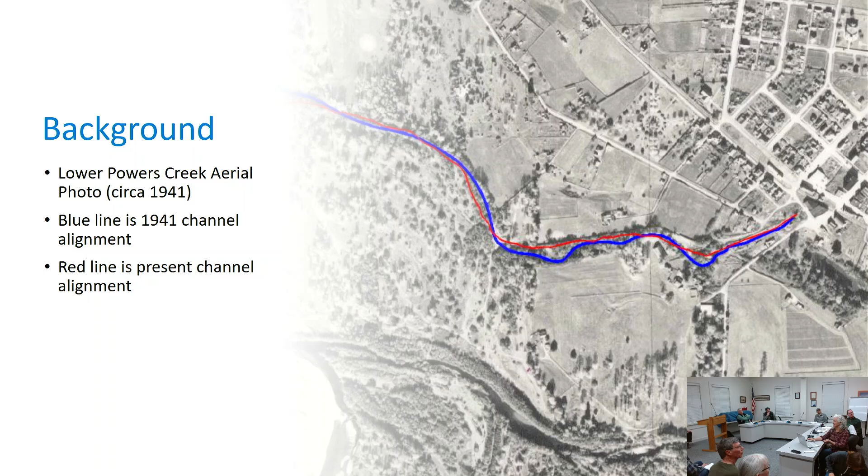In the nice flat loamy soils of the river, and by doing that we encroach upon the creek, and then the creek has to be channelized to be able to accommodate people living there. Here's a picture from April 9th, 1941, shot by Schuster. You can see Applewood Lane, which goes down to

Huh? Sometimes they don't put the screens. Oh, okay. Applewood didn't exist. Okay. Applewood didn't get until. Well, then there was a lane that was not Applewood Lane, which is approximately where it is now. Okay, thank you.

Which has been developed since then, but you guys are aware of the location. To just kind of orient yourselves, here's Hatchery Road. You can see that the creek was coming down underneath the building, and through here, there was a much wider floodplain. It wasn't as developed right at that culvert where it's coming out. Came into riparian forest, and this is where it was channelized. You can see that the forest was still intact.

That's approximately where it was historically, but this is where it was channelized for where the future log pond can be seen. Oh, in front of their house. Yeah, in front of their house. So the channel was brought downstream on the Mad River. Historically, it came across the floodplain this way. It was filled. The log pond, this whole landing was created for timber operations, and they developed a log pond right here.

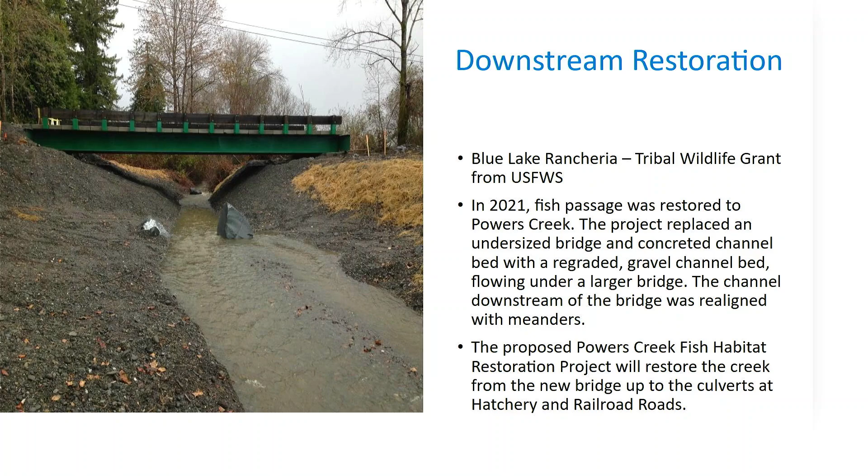So the proposed fish habitat restoration project that we're working on will restore the creek from the new bridge up to the culverts at Hatchery and Railroad roads. That's fun to say. So here's another view looking downstream right after the project was completed. So our project goals and objectives that Dave went through, this is kind of another way to say it, is that we're here to restore salmonid and riparian habitats in Lower Powers Creek and increase the abundance of coho salmon and steelhead populations in the Mad River. In addition, this project will improve flow conveyance and geomorphic function.

Some of the objectives that we have is to improve channel morphology, create and enhance fisheries habitat, and establish a multi-story native species riparian corridor.

Yes, Lynn, can you wait until we're done with the presentation, my section, until we have questions? Sure, absolutely. So what do you need definition for?

Sure. Geomorphology. Geomorphology is a study of the channel shape and how it changes through processes such as a flood, like an every year flood. So you have like a 100-year flood. That's not really going to change the way that the channel is shaped. But you have an every single year flood or every other year flood. And when that channel fills up to the top, we call that bank full.

And that bank full system carries a certain amount of bed load and suspended load, which is the rocks and the sand that are moving through the system. So geomorphology, fluvial geomorphology, fluvial referring to a river, is looking at that process itself and how that system is changing. Geomorphology can be an explanation of a whole landscape. What we're looking at is fluvial geomorphology. Okay? Yeah. Thank you.

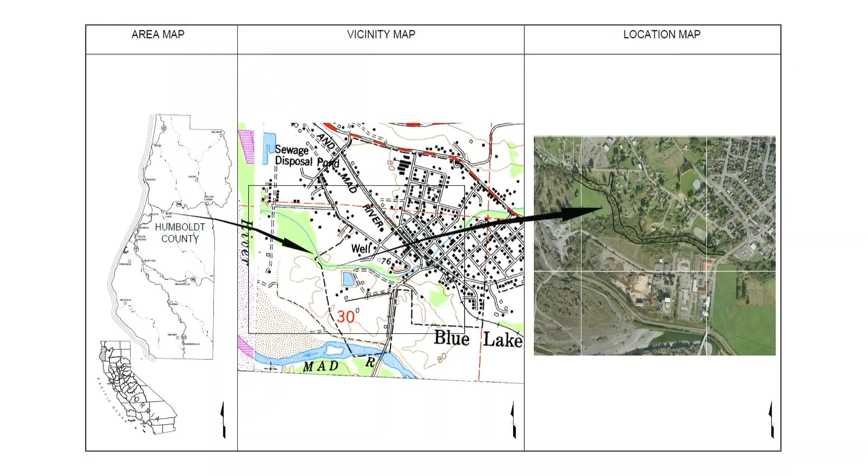So you guys know where you're at. This is your creek. This is Blue Lake. So here's Powers Creek in its existing condition. This was our 30% grading boundary. This is what we started with when we came into the project. We looked at the project and we said, okay, what can we do within this stream corridor? And we kind of drew a line around it, did a grading plan, had 8 to 10 foot inset benches. And we had kind of an idea, a thumbprint on a starting place of how to design this channel.

Come on in if you want. There's still seats up here. Okay.

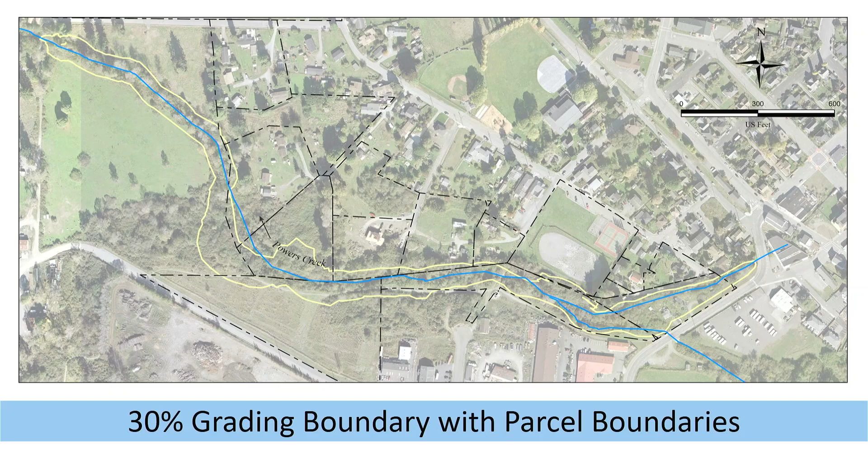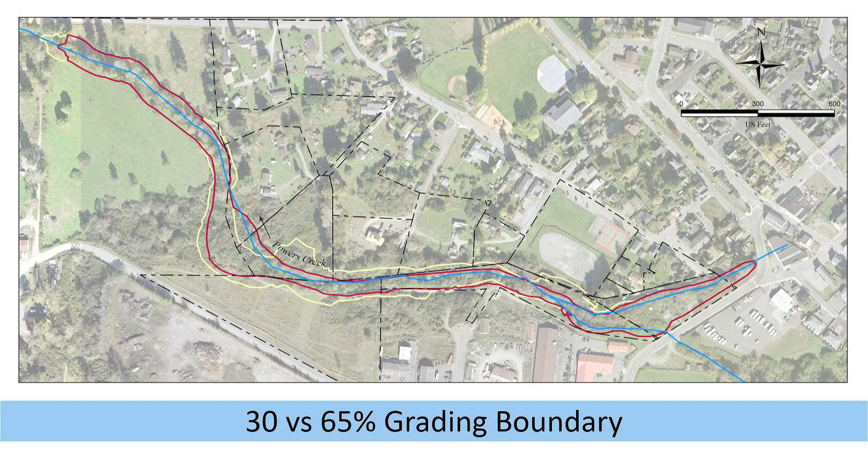Within the 30% design phase, we talked to the adjacent landowners to the creek, and we realized that our project was encroaching in a way that they did not want us to onto their property. So we have adjusted our grading plan for our 65% design, where we have pulled in our project off of areas where we were asked to not cross over into people's property. And so essentially, these are the big changes that we've done between the 30 and the 65% design.

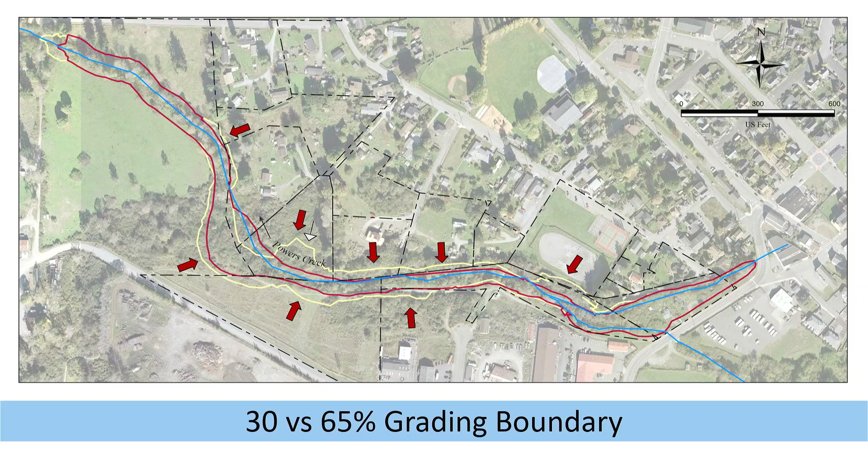So our plan that we had in 30% was a little bit too large, we were thinking big. So now we're trying to kind of scale back, but still have the system work. So this is what we're looking at. I'm going to be showing you guys gradation maps, which are kind of nice to see. These are elevation maps and it's a good representation of how things are situated within the landscape. So the creek here, this is our base map.

We started out with a LiDAR data set that was flown in 2011. It was really great out on the floodplain, but within the creek corridor, we had points that were outside the riparian, and then the LiDAR points couldn't penetrate through the riparian cover because it's very, very thick. And so we also had pretty good points right down the center of the channel where it opens up. And so when they went to go and process the data, they took all the trees out, and we had a surface which was about 50 feet wide, maybe wider.

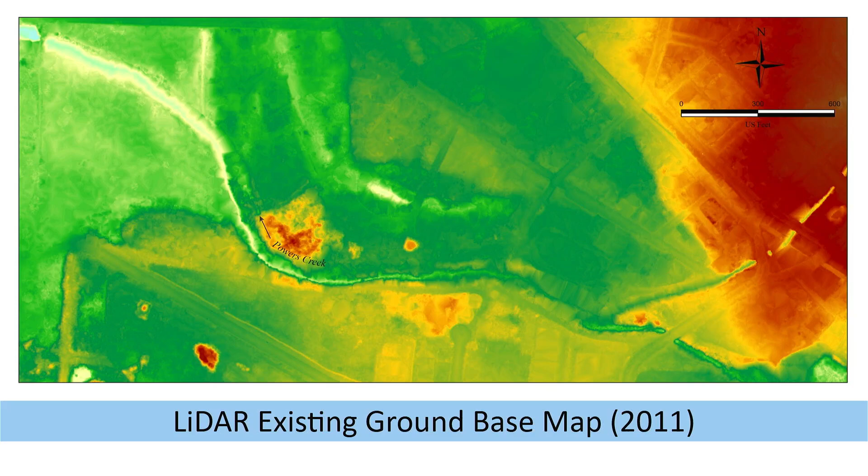It was the floodplain down to the point of the channel. And we're like, this is not good. We can't actually model this. We can't evaluate a grading plan. So we and SHN primarily went out there with their surveyors and surveyed cross sections up and down the channel as we do, and improved this surface so that we could do some computer modeling, mathematical modeling to look at the hydraulics over time.

But essentially what we're doing is through Gary Johnston's property, where we do have a little bit more space to be able to put in inset floodplains, we are designing it as it was within the 30% design, where we do have 8 to 10 foot inset floodplains, pools, wood, all the bells and whistles to create a very channelized, but as good of a channel in terms of fisheries habitat as we can do within a very tight system.

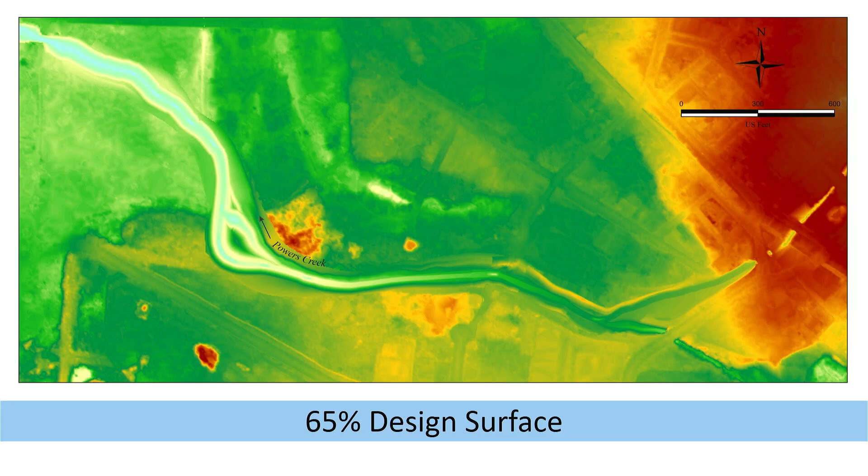Just a second, we're almost to the end of the presentation, then we'll take some questions. Thank you for holding, John.

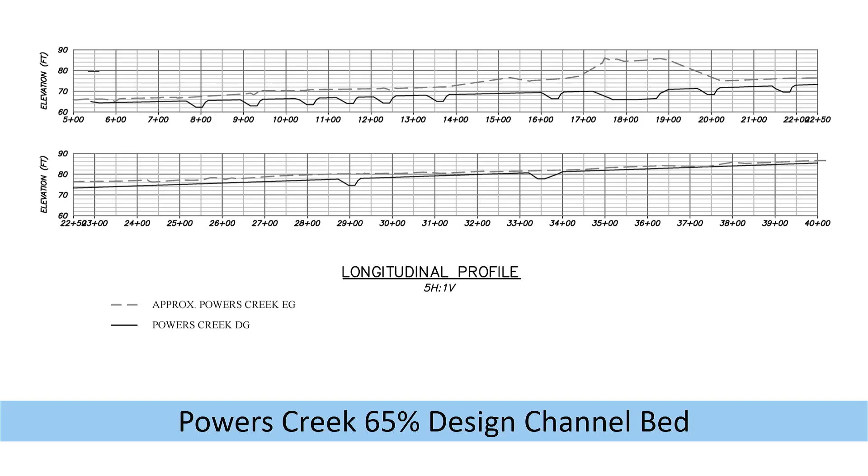They all kind of look similar. We have a cross section that goes through this medial island here in the high flow channel, and then also this meander bend. We have a cross section that I think is on your property right here. Looks similar to the ones that are on your property, just so that you know, where we're having a restriction from the landowner, which is fine. And you can see how we tie right into their existing channel inset floodplain that already exists there.

And then upstream on Boughton's property, this is our lowered floodplain. And this part of the project was put in particularly to deal with some of the flooding that pops out right here on Charton and goes down the road. Yeah, that's the worst. Yeah, and we know that that's sort of the weak point within the flooding. Happening there too on the street.

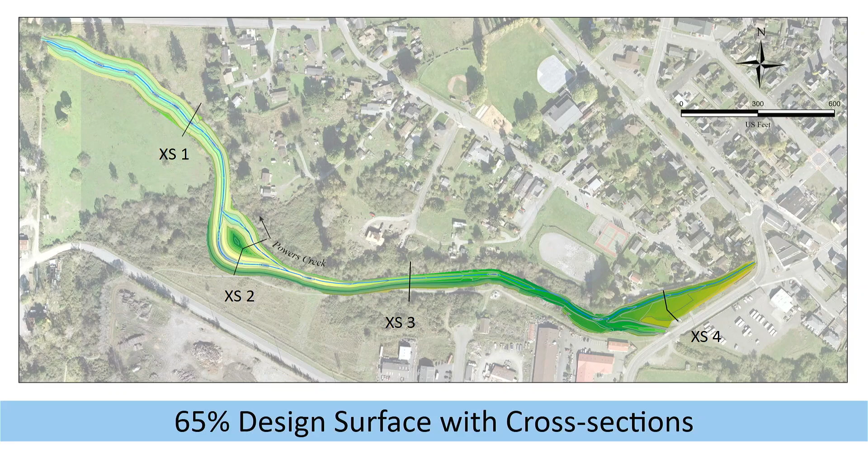What's that? Okay, sorry. Yeah, we'll talk later. Just a minute. We're almost there.

So here's cross section 3. This is on your property. We're tying into.

That's all right. Everyone get up and find a chair. So good. This is so good.

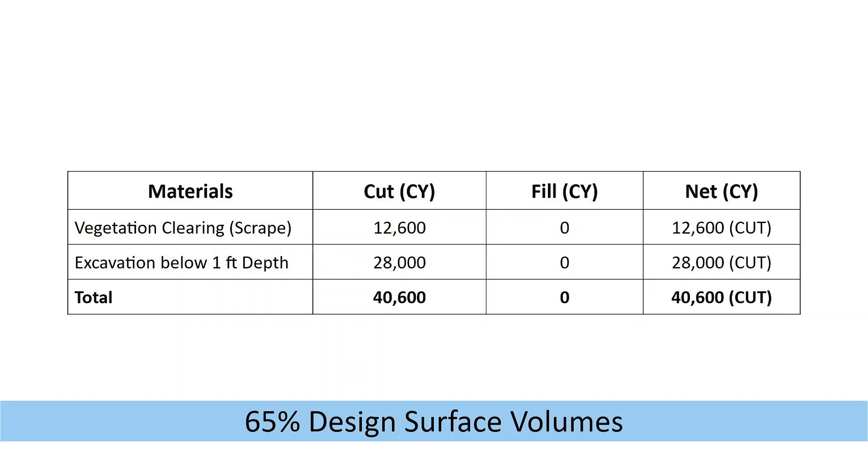All right, I'm going to pass this over to Joseph, who is our botanist. He works at SHN. Before Joseph starts, though, let's have questions for Rose real quick. John had his hand up, so I appreciate you waiting, John. And also, I want to recognize Rose's meticulous work that she's done. Not just Rose, the whole team, but she knows where every stick is, I think, and every rock.

It's John. The slide said 65%. 65% of 100% design. So as an engineer, we stop at different points in our design. We stop at 30%. We're 30% to the end. And we're going to look at our concepts. We're going to look at our design, and we're going to bring it back to the landowners. We may bring it back to our funder. We talk amongst ourselves. We say, let's look at our design and let's evaluate it. Are there flaws?

Are there some critical flaws that will make this infeasible? Are there ways that we can find solutions and work other things into it? Like, this person doesn't want us on their property. Okay, let's change the design in the 65% design. 65 is a little random, I know, but it's how the system works. Yeah. John, Mike has some additional information. Part of the grant is at certain points of the design process, we had to do submittals. Yeah.

So this is like a break. We did the 30%, the conceptual, and from that we got feedback primarily from adjacent landowners, and modified and tweaked the design. So this part, in terms of the model on here, we're close to the end of that. Now it's really getting into details, getting feedback from the agency. So we just submitted this package last week to the funding agency.

Yeah, so it's on Jack Christie's desk at the Department of Water Resources. He's the engineer there that's going to review everything. He'll send comments while we're also going through the permitting process. Yes.

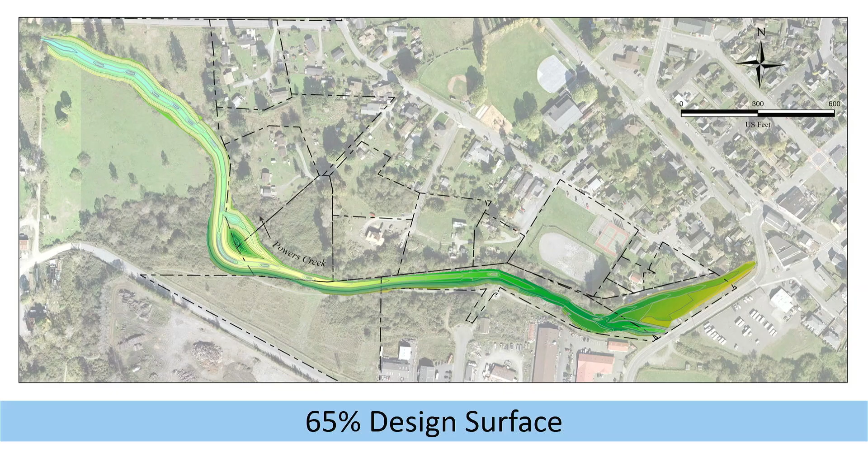Quick, yes, one more question. You mentioned something about a levee near the arena that is not going to happen. Was that to enable a widening there? When you first approach a project, you put in as much habitat as you possibly can, and then you deal with the restrictions and incorporate that into the design. The meander bend that was located within the 30% design would have to push back the levee into the arena. It has been removed to be able to leave the levee as it is.

Okay. We really appreciate all the good questions and everyone's focused attention. We're going to turn it over to Joseph now. Everyone take a deep breath and let it go. Well, thank you all for being here.

As I mentioned earlier, I did the revegetation plan, and we've touched on a few of the important aspects of why we need a good revegetation plan. Just starting with the existing conditions, the stream, as anybody who's walked it knows, is extremely choked with vegetation. Some of that is native willows. A lot of that is Himalayan blackberry. And what we see in these systems is the Himalayan blackberry uses the willows as a trellis to grow up and over and to spread, and then it sets its roots down and it spreads.

Especially in intermittent streams where you don't have summer flows, Himalayan blackberry loves that. So we have a system that's very choked. Another problem with that is, like it was mentioned earlier, it's stuck. There's no room for seedlings of other native trees to get started. There's just such dense cover, nothing can grow through that. You don't have wildlife moving through there. It's basically at a stasis where Himalayan blackberry is dominant.

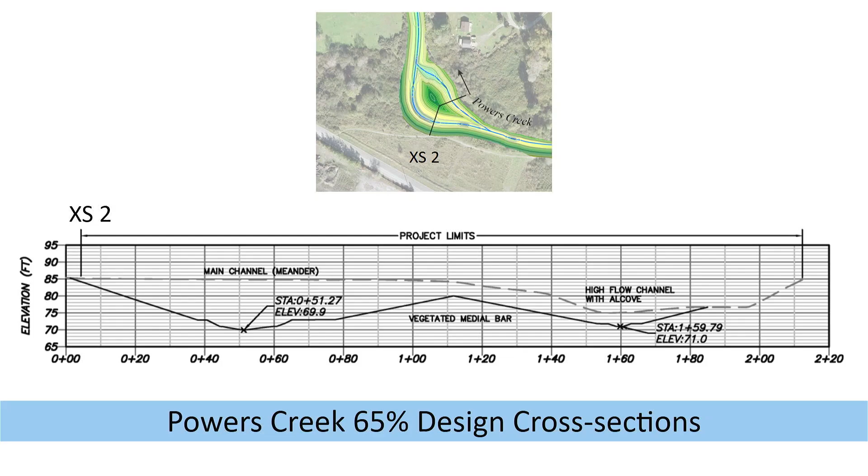I was wondering to what extent the restoration is expected to restore year-round flows, or is it still going to be seasonal? Is that projectable at this point? The channel, yeah, let me try to get. We're going back to 2011 elevations. Thank you. Do you think that'll restore year-round flow? The main channel here is intended to pass, I think, a 1 to 1.5 year event within the channel and its inset floodplains.

Okay. We are going through the 65% design modeling right now. I don't have results for you guys at this point. I will at some point in the future. When we did the 30% design, which was bigger, we were able to contain a 5-year event within the channel, which is huge. I mean, it's a lot of water. My guess is somewhere between the 2 and the 5-year event would be able to be conveyed through this channel, which would alleviate some of the flooding.

I think she's asking about the creek having low flow. Yeah, like during the low flow or dry season. Because we're digging down to the original bed, and I think the groundwater's fine. Right now, if you walk it, and folks have walked it, you see pockets of gravel and you'll see a lot of fine sediment fall out of the sands.

Given what we're likely to do, you'll probably see the entire stream actually coarsen, become more gravelly top to bottom, which is one of those geomorphic functions we're targeting. That helps John's question; it helps keep that fine sediment moving through the system. It's quite possible the creek would be even drier in the summer because that gravel is coarser, so it can accommodate subsurface flow easier, which isn't a bad thing. The water stays cooler, so if it goes downstream and hits a pool where there might be a species, it's actually better conditioned.

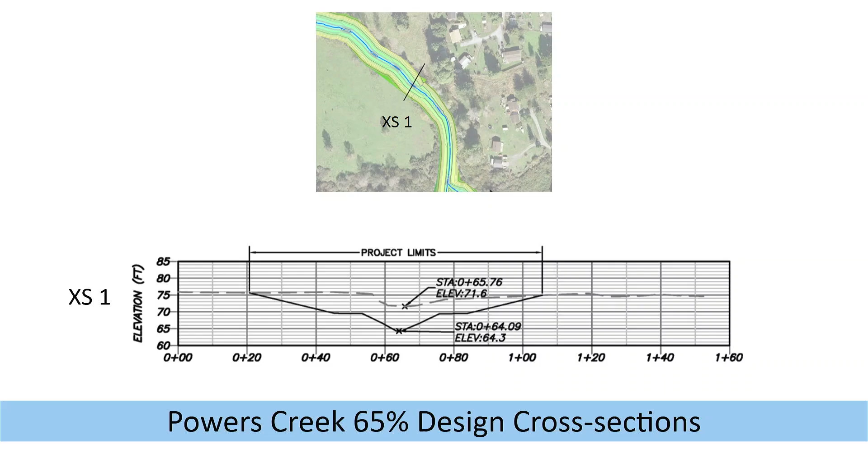Okay, Karina. Well, this kind of segues. I see that we're getting to the project timeline. Yeah, we are, which is good. So this is the piece I wanted to put in there to get you guys in perspective. There are some specific spots that are particular problem areas along the creek now that are contributing to flooding. Part of them are erosion, some are deposition; there's the high deposits, and then there's places that are eroding.

That I've been noticing, just to get a sense of where is that water coming from that's going 3 blocks down the road into my yard, and monitoring it when it is flooding and when it's dry, at different stages. And I sense that you're going to be starting toward the low end of the creek, and the work is going to go from there up, right? That's typically what we do: we start from the downstream end and work our way up.

Some areas where there is erosion, where the water has been flooding, like that place on Chartin, where it's eroding badly, right up to where the road is, where it's pouring in through the fence and filling in that whole area. I was shocked to see that it could do that. How much water over a few hours could flood?

And so I'm wondering if there are areas that you might target as you're moving upstream, but that are further up from where your focus is, to look at as far as just enhancing the flow of the... this is going to be a multi-year process. Yeah, it's going to be a multi-year process.

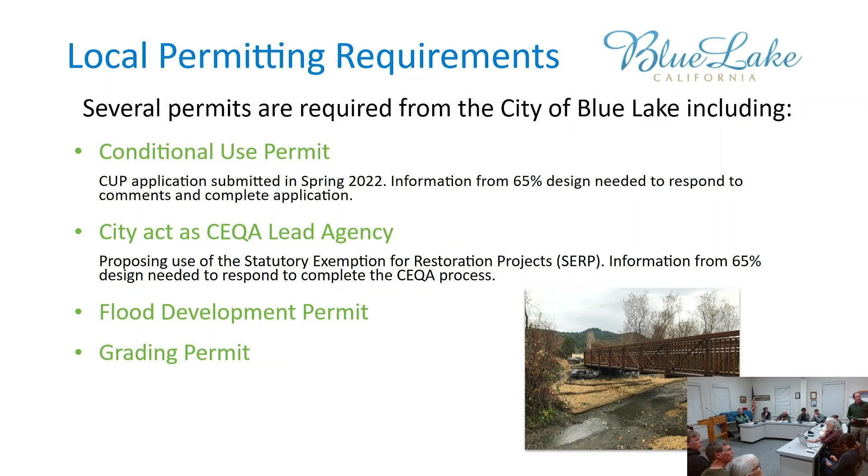The flood development permit, and then of course a grading permit as well. Those are all from the city, local permits. This is a little bit about the statutory exemption for restoration projects. Essentially, the city will act as the lead agency for the California Environmental Quality Act. And the city has to make its determination first that SERP, or that statutory exemption for restoration projects, applies.

And we do so in a form provided by the California Department of Fish and Wildlife, and we submit that to them. And so they review that, and their job is to review it to determine whether they concur with that determination or not. We've already met with them in advance. We believe that they will. They like this project. So next slide, please.

Gary, hold on. Can you go back to that slide for people that don't know? Oh, good point. So that was downstream on Gary Johnson's property. Rose mentioned it before. There's a several foot difference there. And until you got really high flows, fish couldn't get up. And a lot of time it was functionally a fish barrier. And yeah, it looked horrible. So when you see that other slide, it looks really nice today. That was a successful restoration project. Thanks for pointing that out.

So just a little more, I kind of already touched on that, but we'll mention it again. So CDFW, this is the state and federal permitting, has its lake and stream bed alteration agreement. Anytime you're impacting the bed, bank, or channel of a stream, you have to get one of these from CDFW. Now, it was already submitted to them in 2022, and we got a big, long, incomplete letter back that we've been addressing since then. So bringing on Northern Hydrology, SHN, Joseph doing the revegetation plan, these are all the components they asked for in a resubmittal to CDFW.